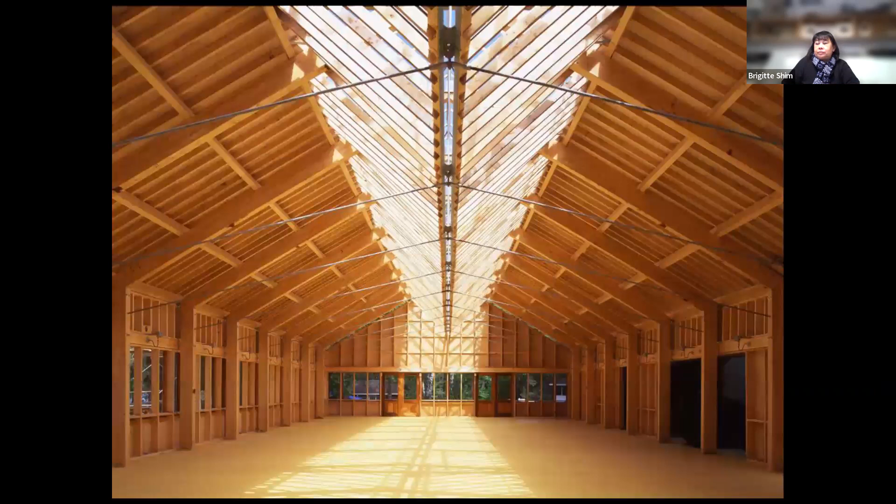This is a dining hall about 3 hours outside of Toronto, called the Moorelands Camp Dining Hall. It's a camp that's been around since 1907, set up by the Anglican Church to get youth out of the city during the summer to experience nature. We were asked to design a dining hall, and we really wanted to celebrate light.

It's a seasonal building, so it's only open from maybe May till October. What you're seeing in the main space is a series of glulam frames and metal tie rods that work in conjunction with the wood, and then down the center is a whole series of 2x4s—very simple wood elements.

Above it is motorized greenhouse glazing, really off the shelf, very much industrial greenhouse, but it provides both light and ventilation. It's motorized, so it can go up one side, the other side, or both sides, bringing light and fresh air into the space at the same time.

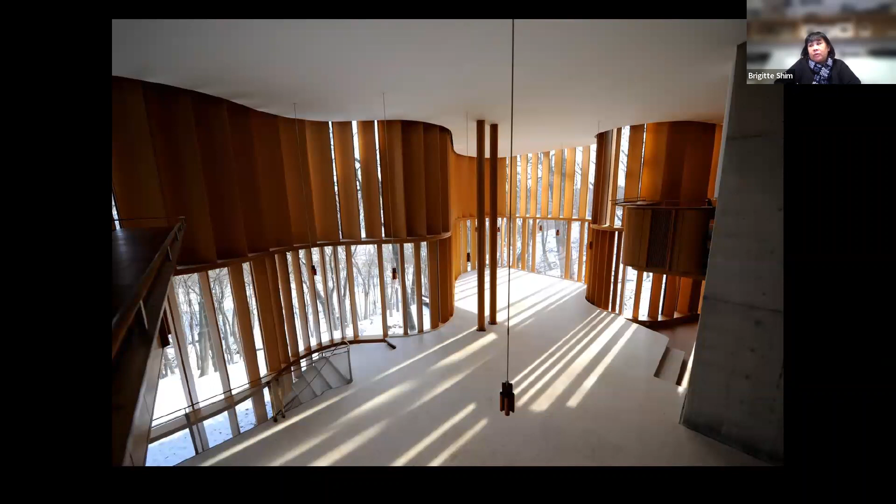This is a project I'll actually be sharing with you called the Integral House, which sits on the edge of a Toronto ravine, but what you're seeing here is winter light. We live at 43 degrees latitude, and the role of winter light for us is really important because it's a very low raking light and it changes so much. You can see the ravine beyond is actually denuded—it's winter season—and it's only during this time of year that you get these amazing kinds of light qualities that differ fundamentally from spring, fall, and summer.

So we think of ourselves as architects who paint with light.

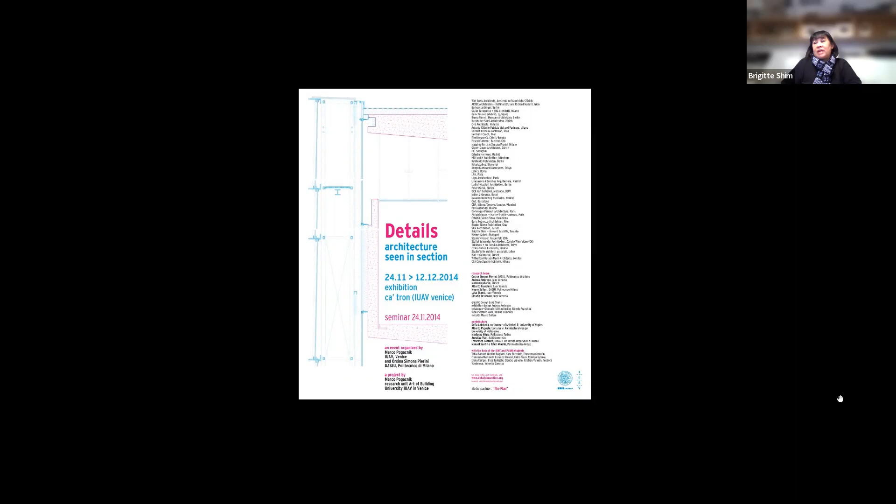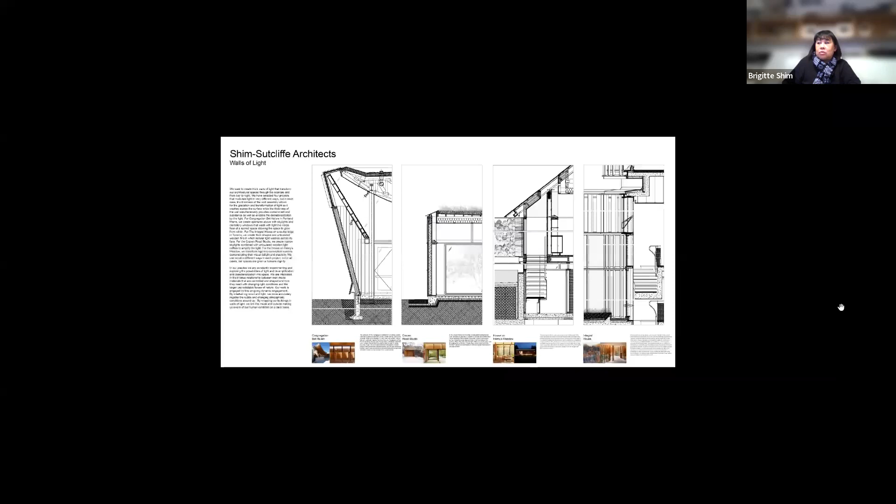This is our panel where we selected several projects and blew up the actual sections really large. We called it 'Walls of Light,' so that within the thickness of the wall itself, there were different ways that light informed and embedded itself into the wall. We then used it to study a lot of our projects with the role of light.

The image on the left is a diagram of a very small building we designed, a studio, with a very small skylight that becomes the aperture, and the wall changes thickness on every surface. The image on the right is a section through a synagogue we designed in Portland, Maine, showing the asymmetrical section, the curving underside of the roof, and the way light enters the space itself.

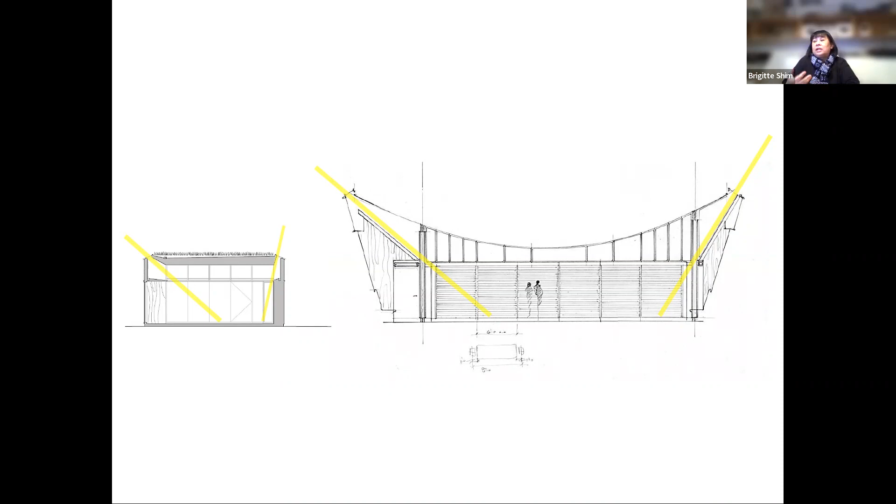So it's just something that we think about a lot. We love the way light can be manipulated and shaped to really give a certain specificity to places. This is a view of that small studio and a detail where you can see this small skylight, and then the thickness of the wall.

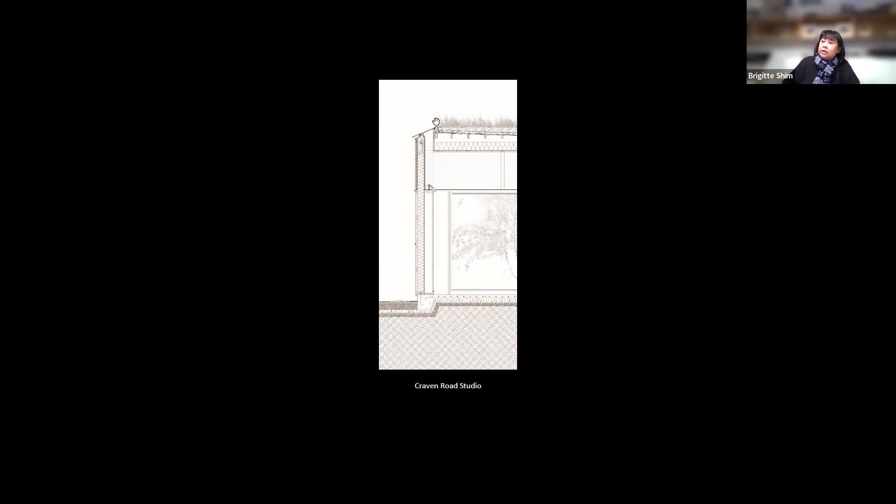In the image of this one-room studio, you can see that each wall is a different thickness. One wall is for display, another wall is for storage. The skylight stays the same, but the thickness is related to the program. The light enters these wooden coffers and illuminates the room itself.

And here's the display wall. So for us, these small projects that we do in our studio are really important because they become laboratories for experimentation.

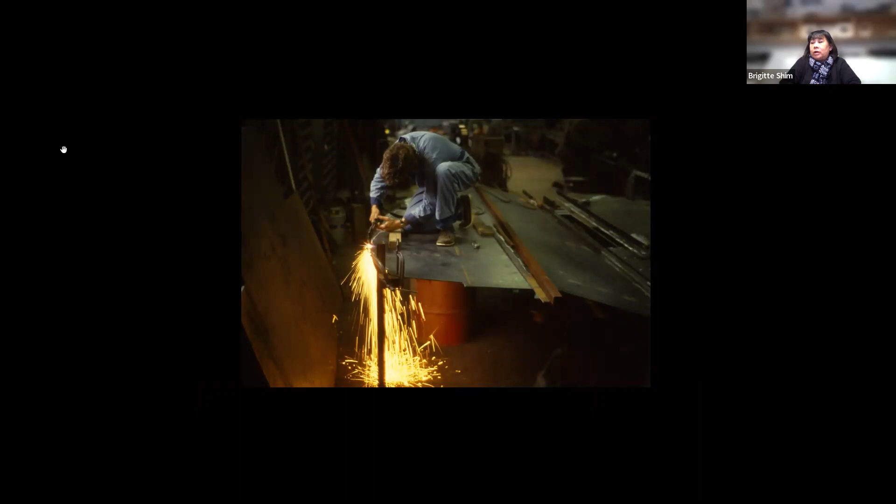This is Howard, my partner, flame cutting the edge of a roof that's about 1.5 tons of rusting steel. In a way, it indicates our long-term interest in materiality. We actually work with real materials, and we love working with fabricators. For us, it's a critical part of really shaping buildings as opposed to specifying buildings.

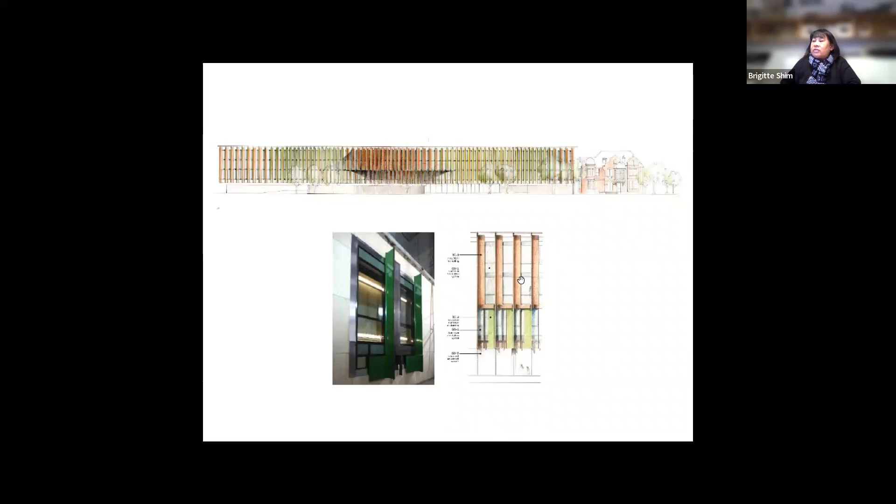This is a facade of a project I'll show you later for a group of Catholic nuns, but we're always also trying to do full-scale mock-ups. This is a view of the elevation of the building, a detail of one portion, and then a photo of a full-scale mock-up that goes about 1.5 floors.

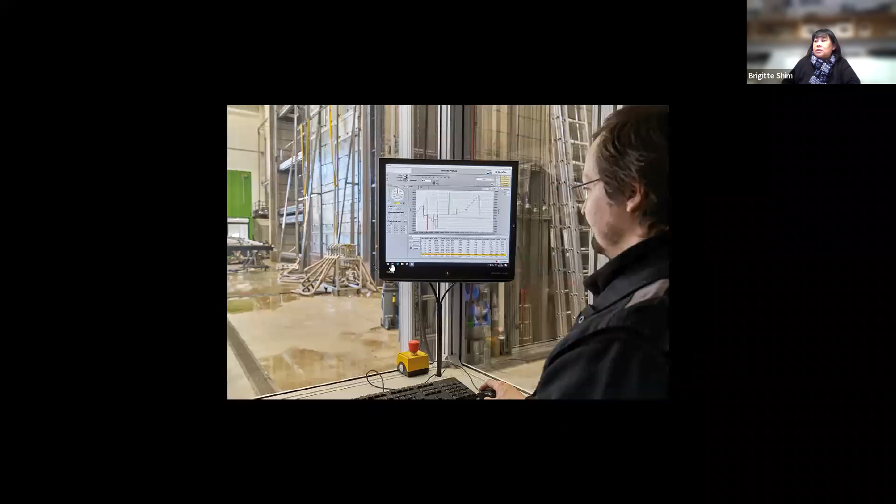The project envelope and the vertical sunshades were actually built in Germany. This is the mock-up in a testing facility, where we were able to test it—they hurl water and push it by wind. They monitor it and do a whole analysis, finding ways to improve the performance of the actual system with minute adjustments before the window goes into fabrication.

The Taoists actually do Tai Chi, which is a form of exercise. You've probably seen people doing Tai Chi in a park somewhere. But for the Taoists, it's actually a key aspect of their spirituality. It's not just an exercise, but part of their sacred practice as a religion.

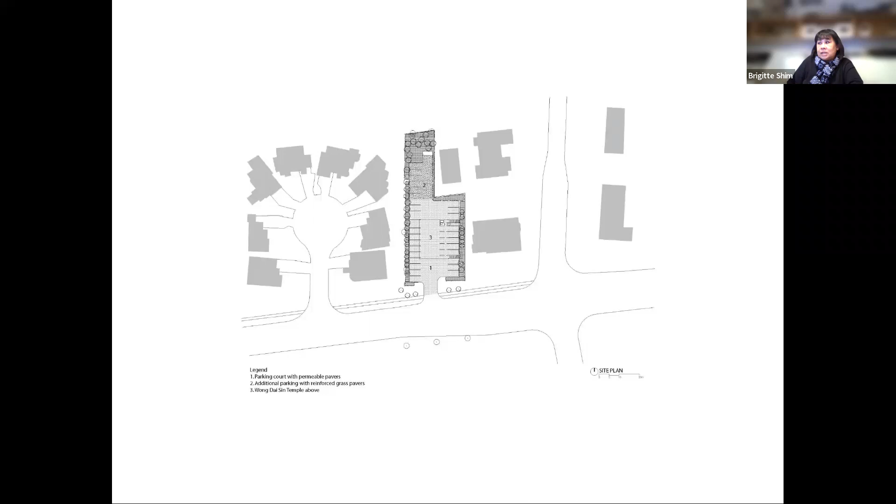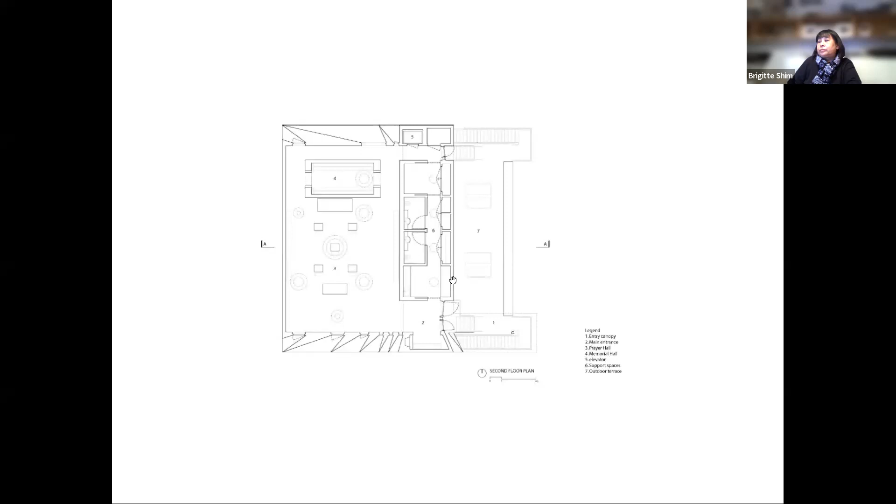The plan is very simple. At the back, there's a memorial hall for honoring your ancestors and burning incense. The room itself is for chanting and praying to Wong Dai Sin, which is the deity the temple is named after. You can see these deep fins that provide both privacy and cross ventilation, then washrooms, back of house, and a small kitchen. A pretty simple plan with an outdoor terrace on the other side.

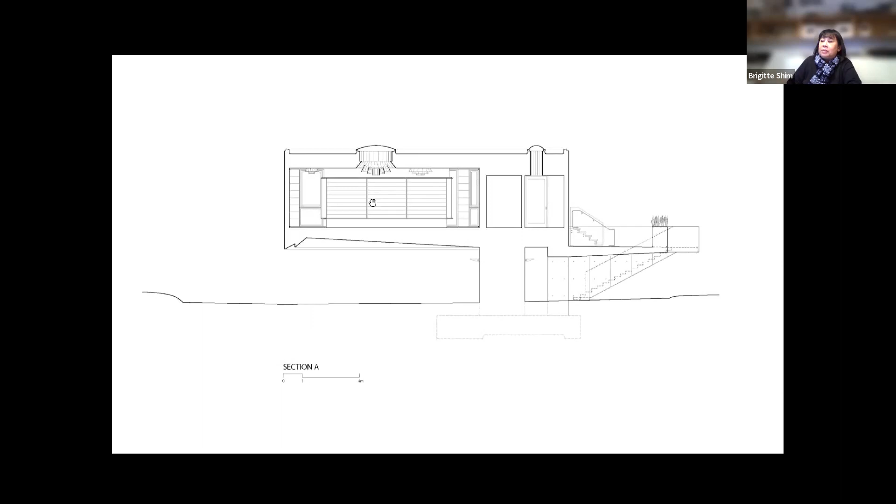And then in section, it's actually very telling. You can see the 10-meter cantilever, the structural concrete, poured in place concrete piers, and the 5.2 meter cantilever. You can also see these circular light monitors that are key to the most sacred part of the place of worship, and the way the structure is cantilevered in both directions, which is a really key part of the project.

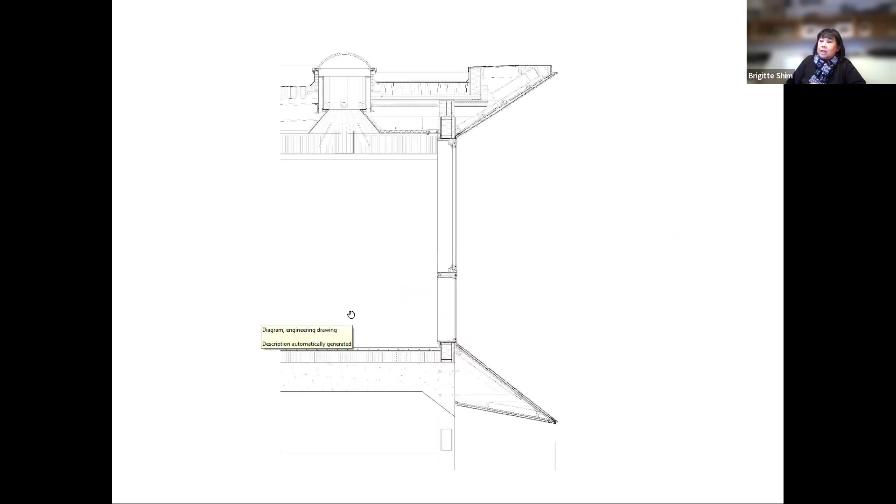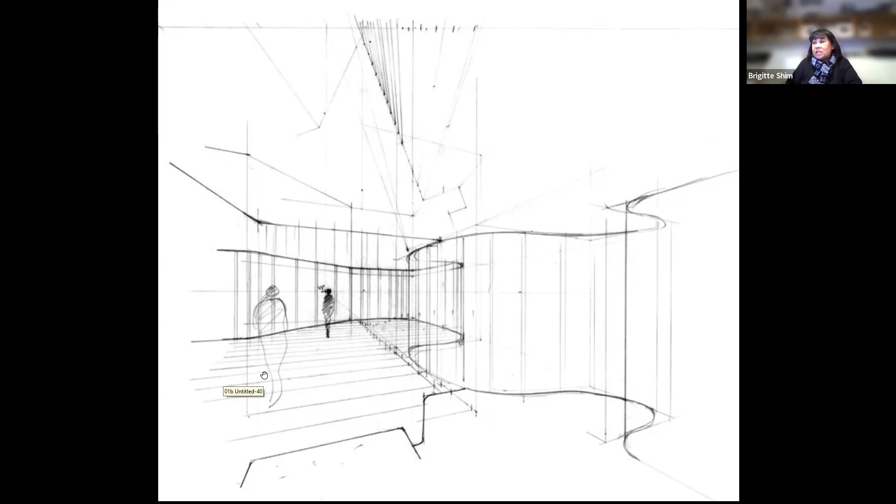This was a very early sketch, and this was a study model looking at the main space. In addition to curves, he wanted a performance space. He was a concert violinist and wanted a performance space for about 150 people in his living room. So in a way, it's a private project that straddles a public program.

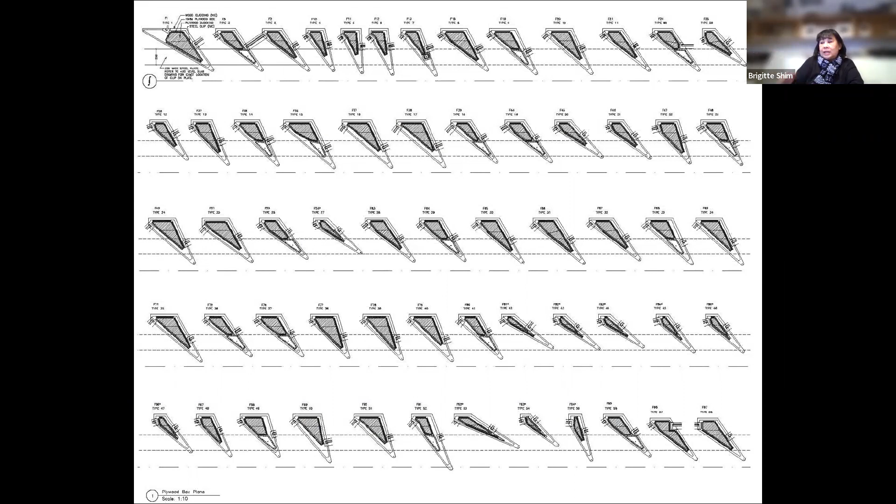Here's an aerial view looking down at the main living space. As part of that living space, we designed 97 different fins that help to shape the light. You saw in the image we showed in winter, this long winter light - part of how we achieve that is through these shaped fins that bring the light in, but also adjust and alter the kind of light before it enters the space.

In these deep fins, we embed a double glazed sealed unit between the shaped fins, and every third one of these fins is actually structural, so it becomes a huge structural cage. But really what happens is that you're looking at light and wood - the light passes through and develops a warm glow because of the way it passes through the wooden fins.

This portion is exterior and made out of a tougher, long-lasting wood, and this portion is interior, part of shaping the interior space. The glazing is a double glazed sealed unit, but it's actually embedded in the wood, so you don't really see a window frame. All you see is light and wood.

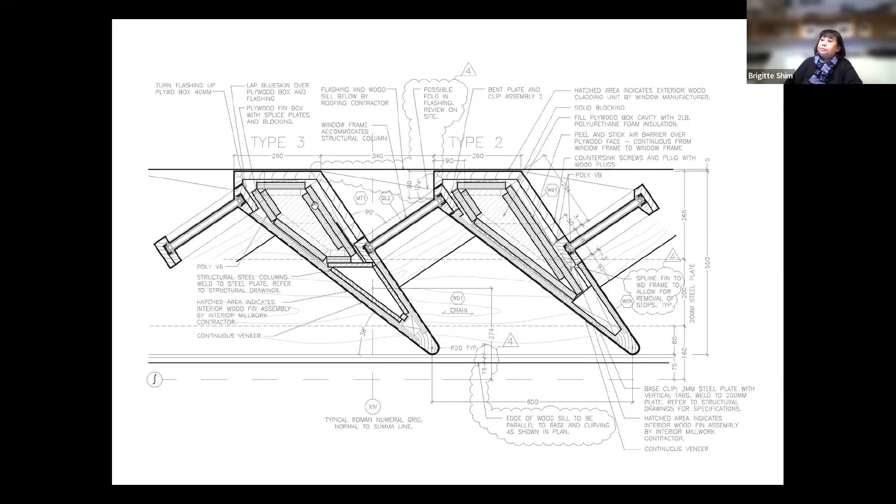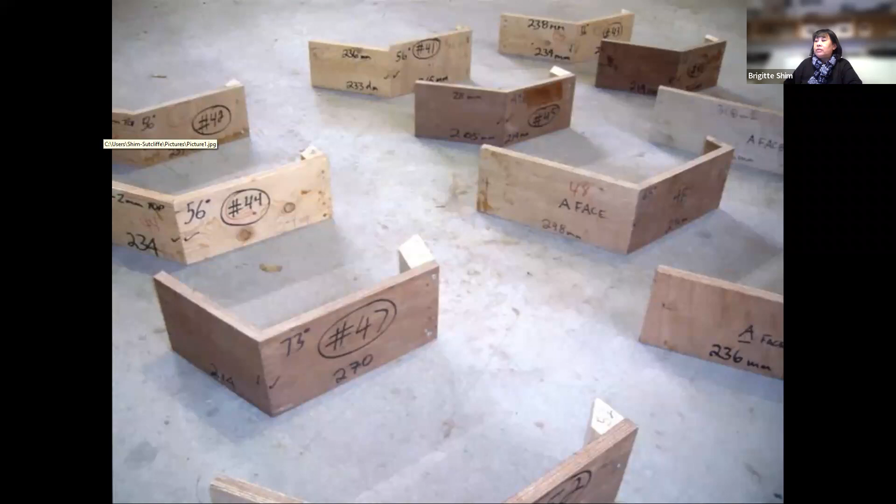Here's a view of a series of these outdoor covers - you can see they're all numbered, and they're fitted to go on the exterior of the building. And here you're seeing some of the interior fins that were part of the construction process.

We also have what we call a more standard fin, with a kind of snap cap, a double glazed unit, and then a more standardized fin. Again, you never read the window frame - the actual double glazed unit just slips in behind the wooden fin. So again, all you're reading is wood and light.

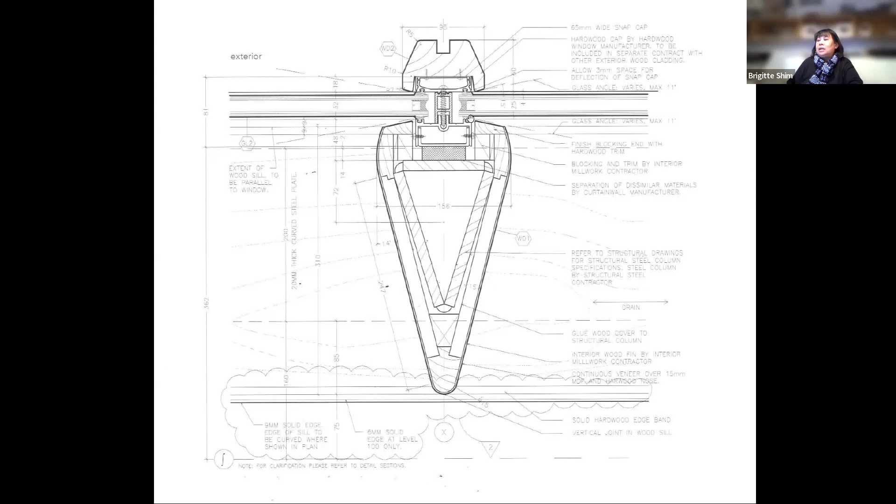Here's a full-size version of that same detail, and here you're seeing the standard fin. In a way, both become really key in building this kind of elevation in the middle of a ravine forested landscape. Here's a whole series of studies, just a selection of many.

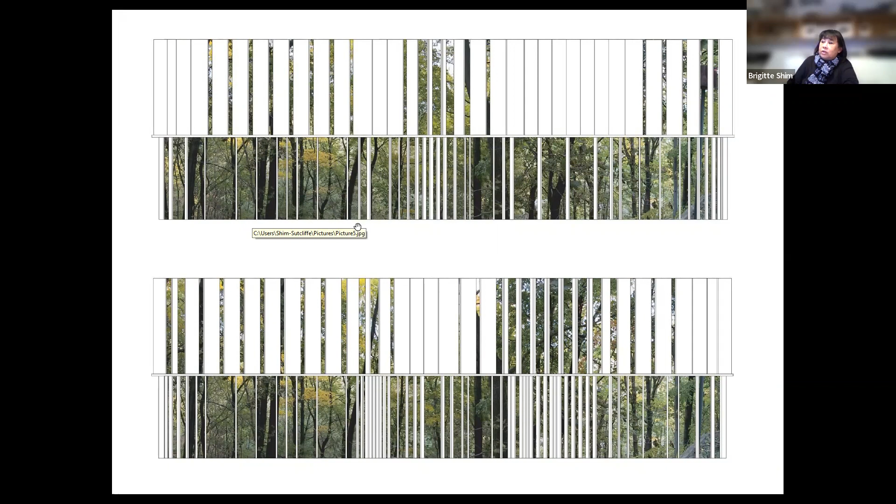The upper portion are the deeper fins, those 97 different ones I showed you, and the lower ones are the standardized fins. Every third or fourth one is structurally loaded through to the foundation of the building. We're using these collages to test the way it creates different views and shapes your reading of the landscape.

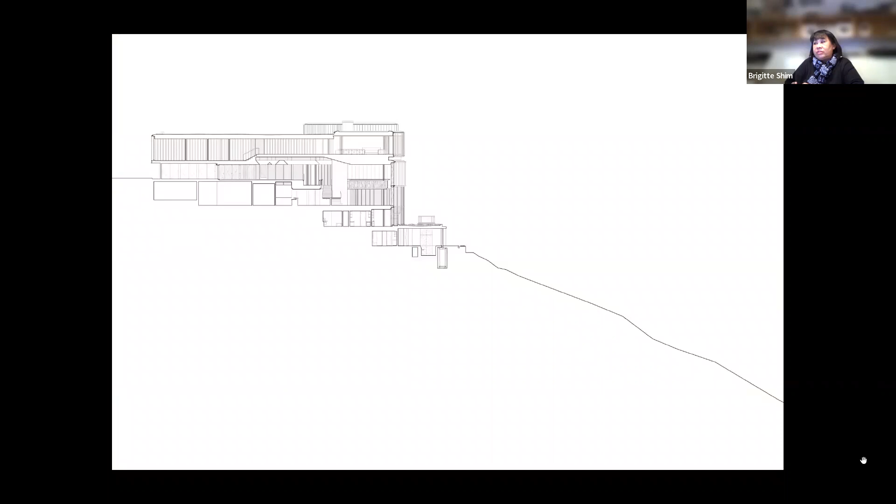Here's a section - the street and the city are up here, and the ravine itself ends up somewhere way down here, so you're really at the edge of this important natural feature that helps define the city of Toronto. This is a cross section where you enter at this level.

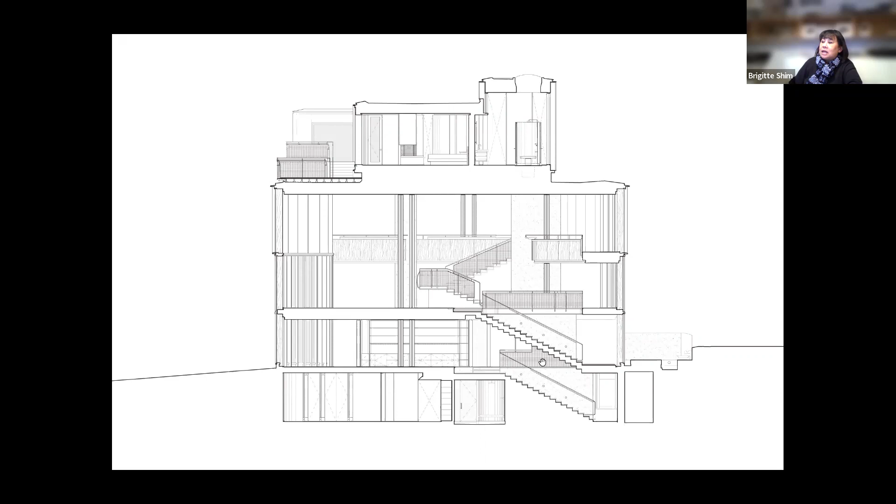You come down a full floor to the performance space where 150 of your closest friends can hang out with you. Above are some residential bedroom spaces, study spaces below, and then pools at the lowest level.

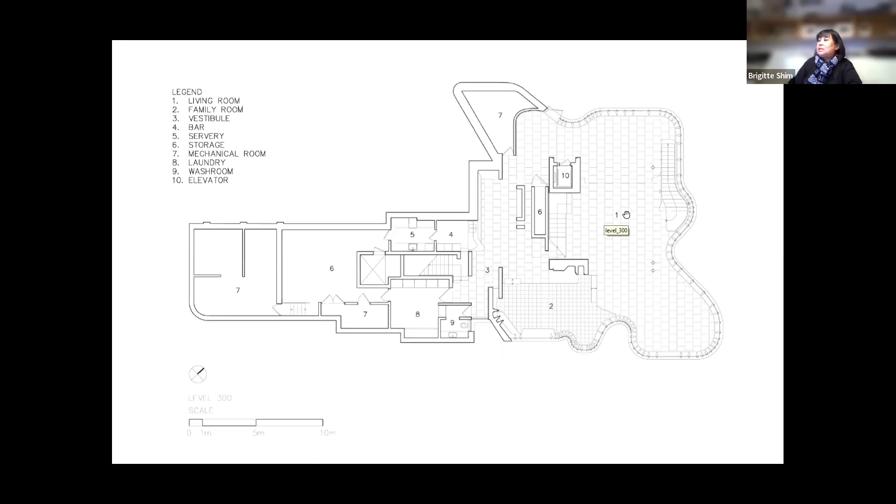The material palette, we actually use concrete, kind of limestone, bronze, and leather, and then a stainless steel mesh, to be part of the kind of vocabulary on the inside.

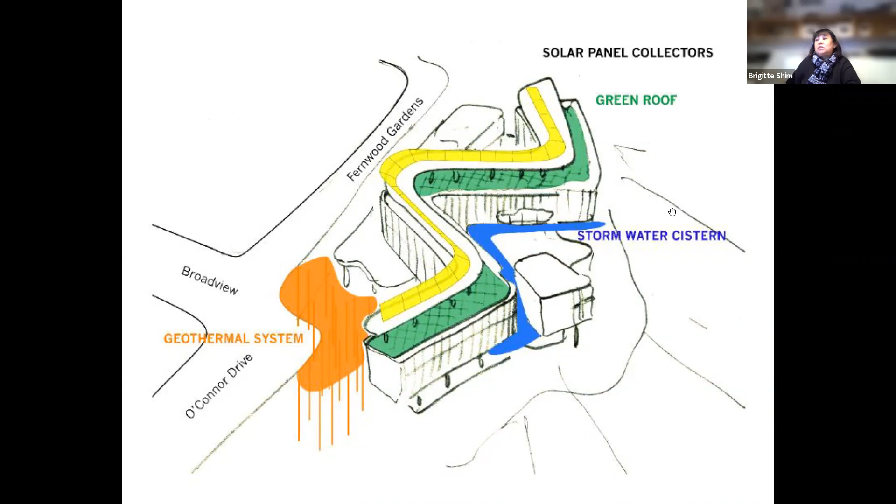One of the important things is that the sisters wanted the greenest building they could afford. So we looked at a whole system of geothermal, PV panels, green roofs, and rainwater collection, and priced everything umpteen times until everyone agreed we could afford it. It was about getting the best value possible for each of these elements and seeing it as a system that worked together.

The project is a residence for 54 Catholic nuns, with a chapel, dining rooms, and the restoration of an 1850s house. This is an axonometric view, and what's important is that in the middle is a double loaded corridor with rehab and nursing stations and support facilities for the sisters. Each of the wings are single loaded corridors where many of the sisters' rooms are located, so you can go from the single loaded to the double loaded back to the single loaded.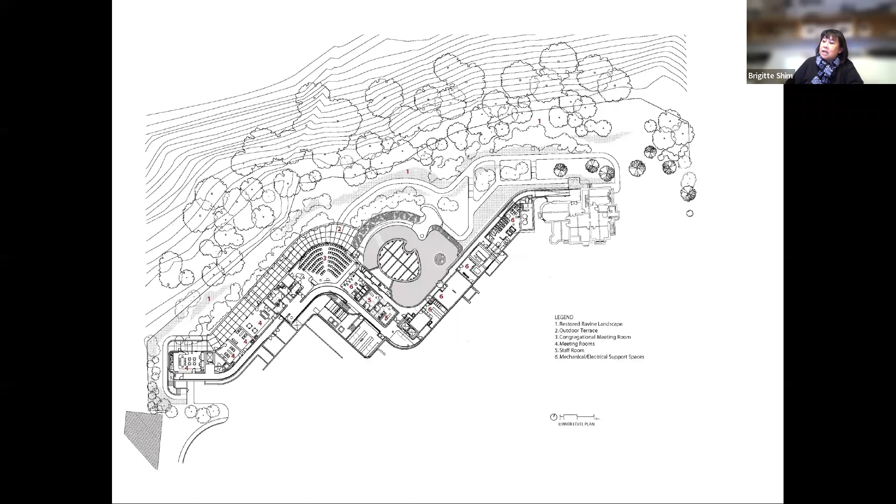This is the lower level of the Taylor House that connects underground to all of the back of house spaces for the sisters. As we go up, you can see the double loaded corridor and then the two single loaded corridors.

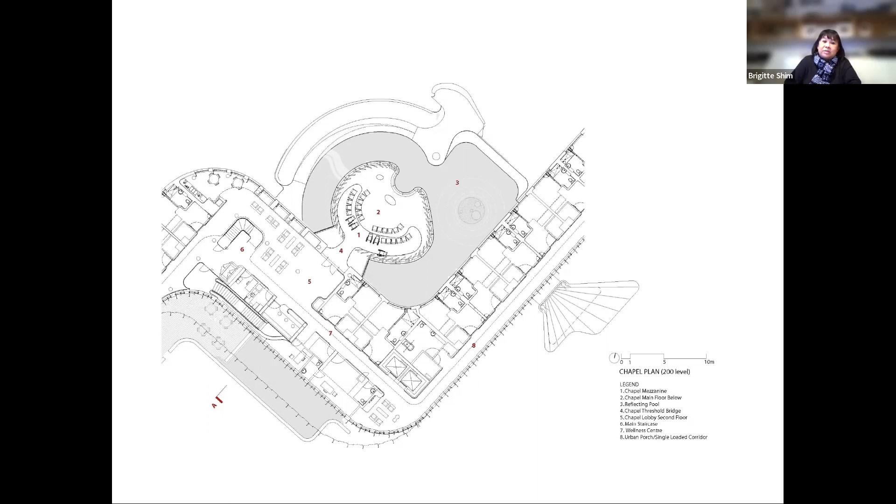And then we actually have the chapel, which for the sisters was actually one of the key spaces, given that they are women, religious women of faith. And they really wanted a chapel where they could see nature. They had a very large chapel in their previous monastery, and you couldn't tell if it was snowing or raining because it was so internalized. In this new chapel, they really wanted to be connected to the seasons, and that was very much part of the program that they asked for.

And so here you can see the sisters' floors where the residential rooms are. And from the second floor, the most infirm sisters can actually enter the chapel from the second floor and partake in all of the religious services from there.

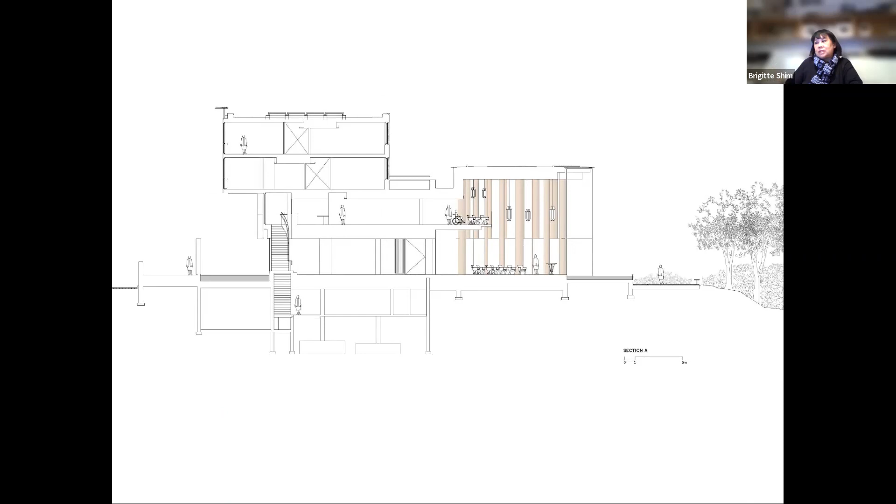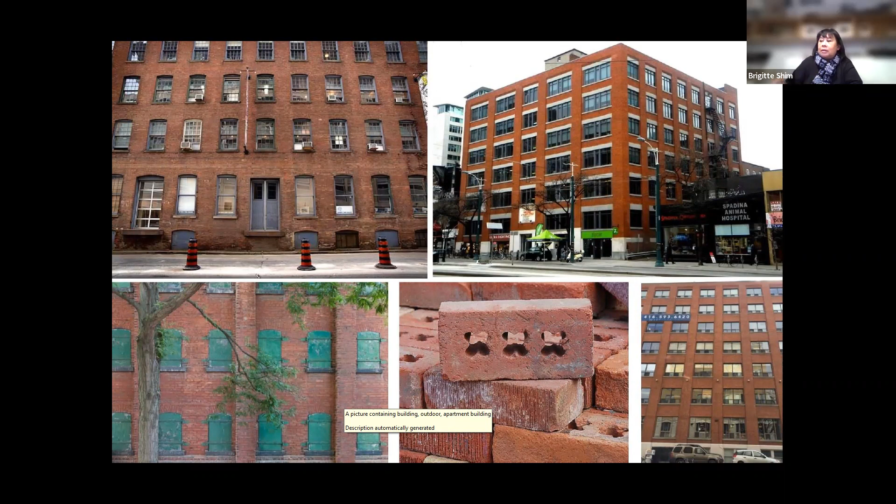And so we started off in a neighborhood that is full of these existing red brick warehouses. Toronto is a red brick city. The clay came from the Don Valley. The bricks were fired in the valley, and it's really the fabric of much of our city. And many of these warehouses that are such amazing buildings are being demolished or renovated. So there are very few warehouses left in this area where the hotel is, when before it was populated by hundreds of them. So we're designing a new building, but we actually wanted to recall these amazing existing buildings that are dwindling.

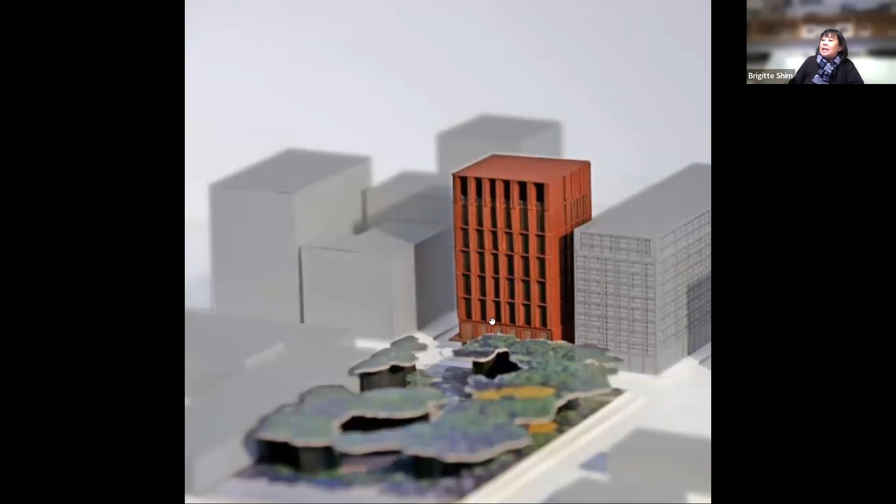Here's a study model showing it. This is a small playground called St. Andrew's Playground, and these are new buildings. And here's our 14-story hotel sitting within the city itself.

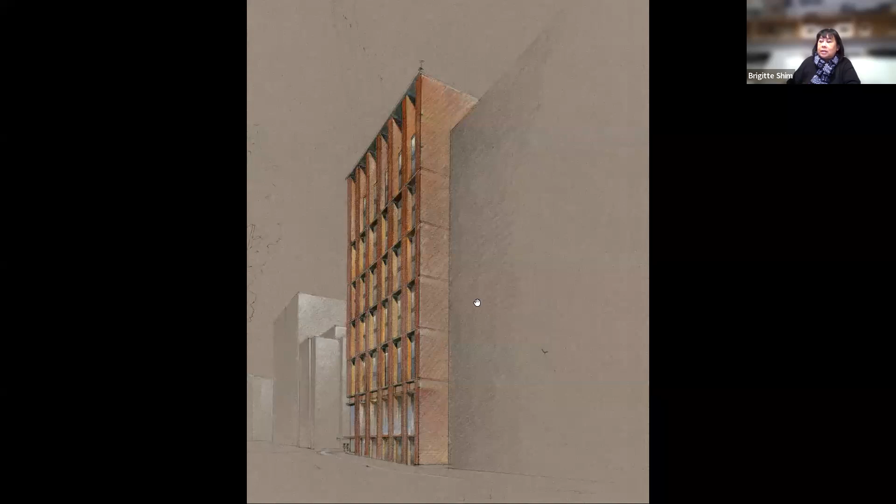Here's a view of it from walking up the street, where it sort of has depth and plasticity, and is really recalling these kind of red brick turn-of-the-century industrial warehouses.

This is a view of the front facade that you see from across the park, and where each of these bays is actually 2 floors. We wanted, again, to have a certain ambiguity as to what the scale of the building really is.

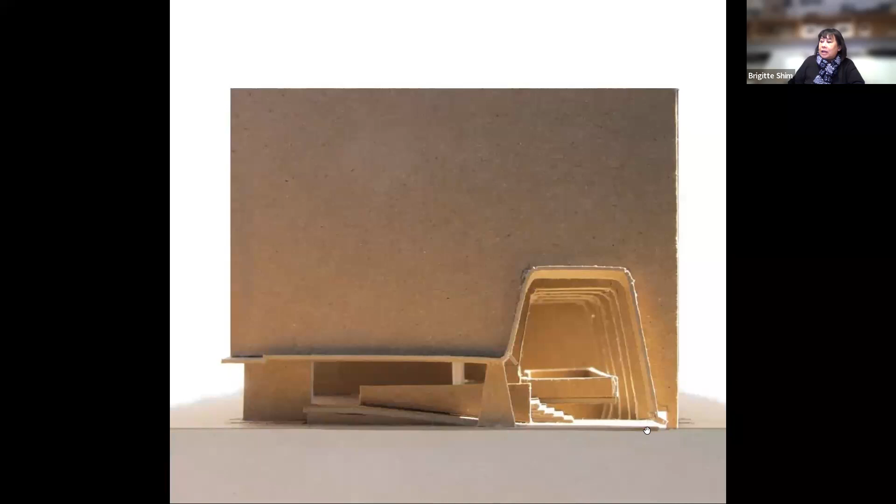Here's an early study model where we're looking at a series of poured in place concrete frames that transfer the load from the hotel rooms, and use these robust poured in place concrete frames to shape the lobby.

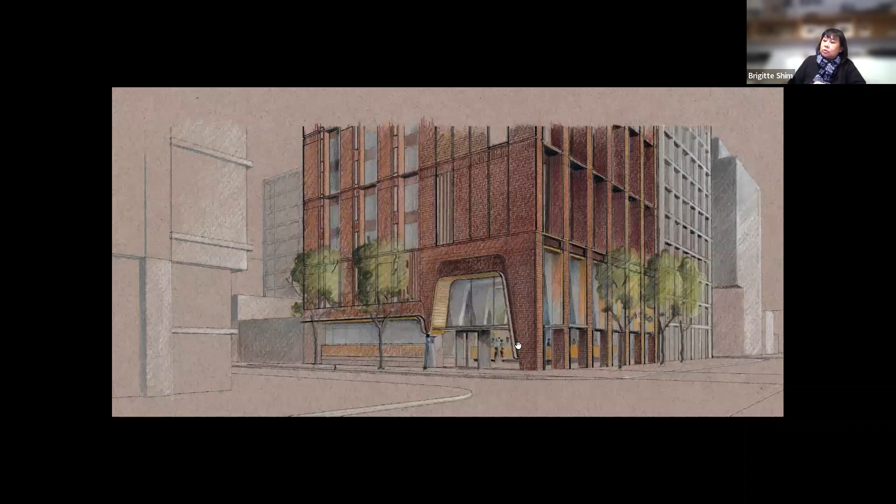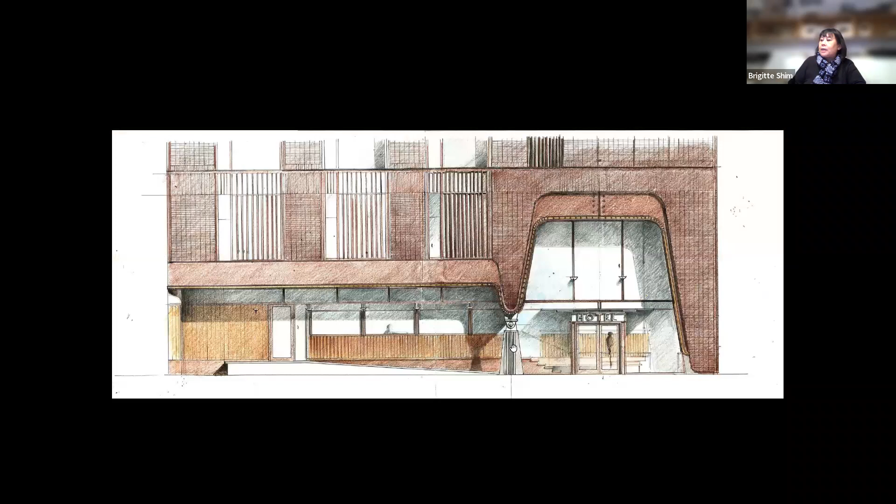Here's a drawing of the corner condition, so again the kind of one side looking onto the park and the other side, which is a smaller side street. And the main public entry, and then ramps for luggage and for accessibility to bring you to the same location at the entrance.

Working with brick and shaping the brick, steel, a whole series of metal screens that work in conjunction with this red brick iron spot that we've chosen.

Drawings that show this kind of big structural poured in place concrete frames, and then the lobby is actually slid inside and supported from these frames itself.

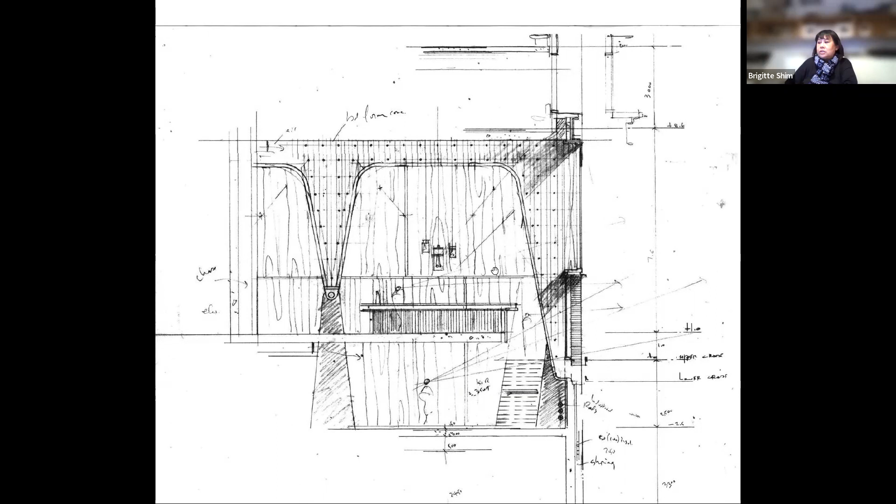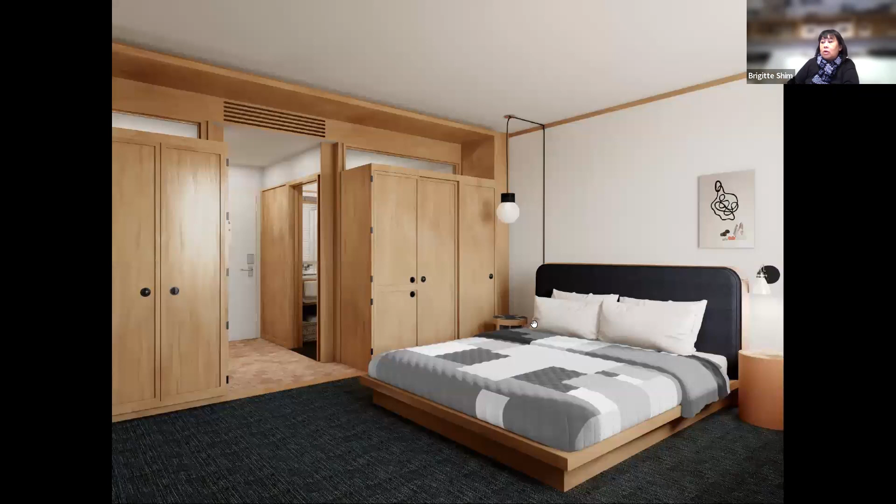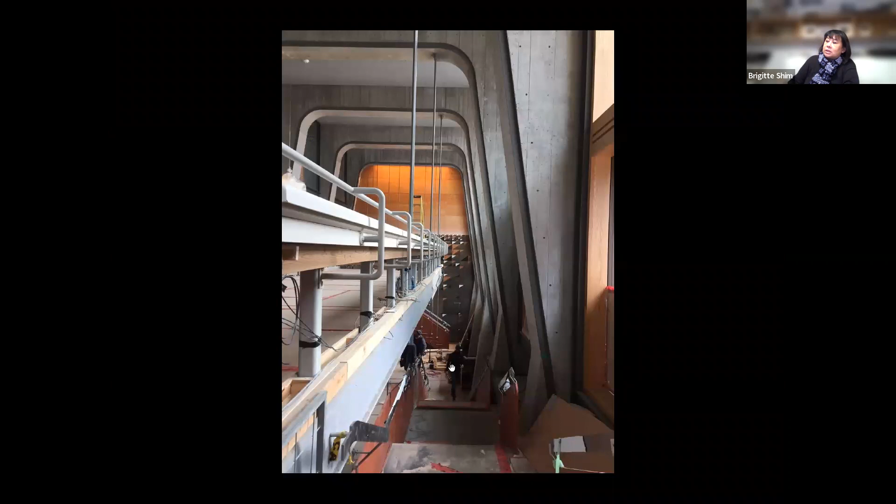This is a view of one of the hotel rooms, so that it almost feels like a cabin in the middle of the city. And then a view here where you're at the entrance looking down into the lobby. The hanging portion of the lobby is on the left, with these rods that support the lobby from these large poured in place structural frames.

And to enter the restaurant, you actually slide down between the outer wall and this hanging lobby to end up in this triple height space.

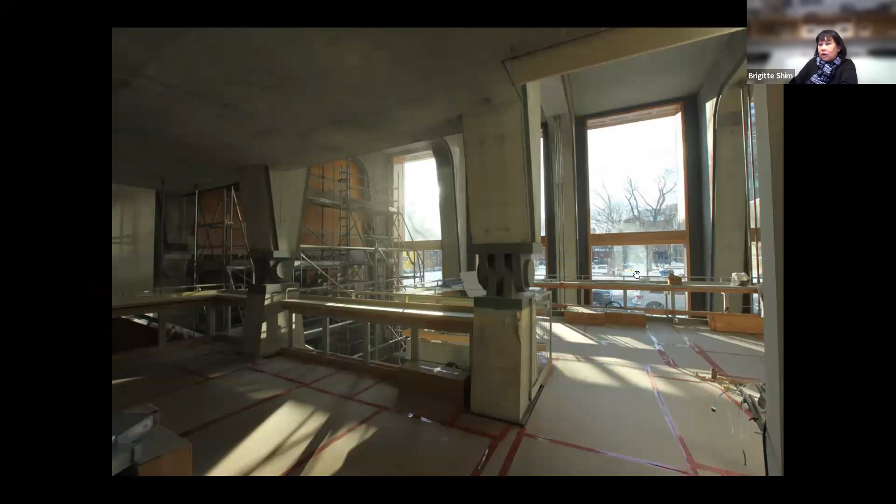So again, these are all construction photographs, but you can see we're standing in the lobby itself, looking south, and you can see those big concrete frames, the big knuckles. Then you're here looking out over the park, St. Andrew's Playground, and again, the scale of the knuckles in relation to this urban lobby space.

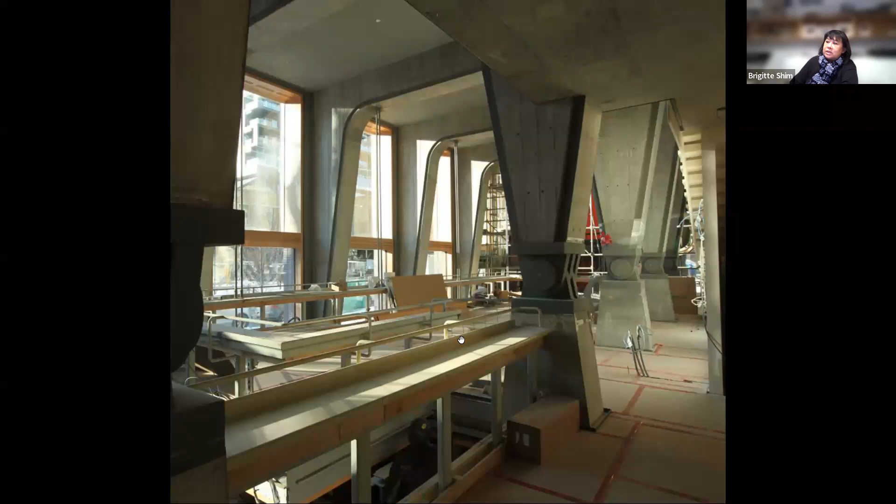Again, a view of a three-story art installation and the kind of afternoon light entering the space. And views along the space where you're seeing, in effect, the long view down.

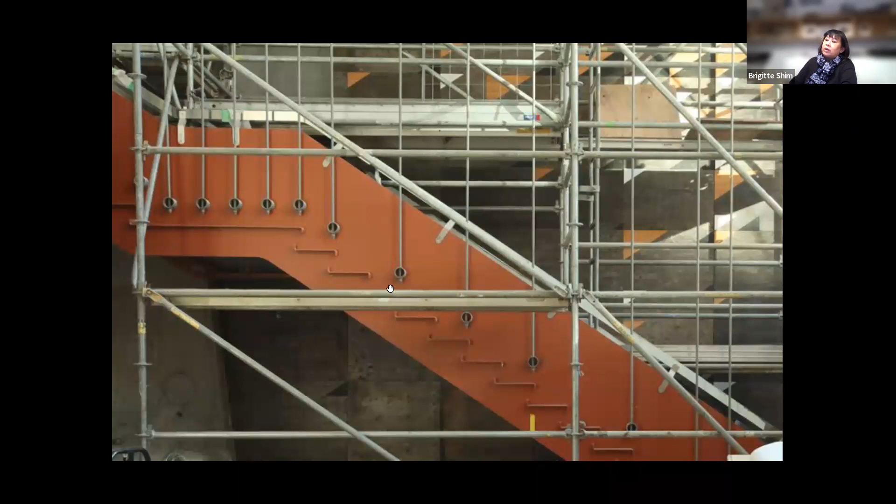And then details of the stair itself, where we're also using rods to hold up the space. And again, a view of this art piece called Horizon Line and its role within the overall project.

So that's my last image, and it's really a kind of work under construction, but it gives you a sense of what's to come, and we're really excited to see it happen because we really wanted to create a dynamic civic room in the middle of the city where people could really be in the city, but also enjoy this kind of dynamism of this multi-leveled space.

So thank you so much. I hope you have a better sense as to how we work and some of the things we think about, and the way that we actually approach architecture, both through process and through the final results.

Thanks, Brigitte. That was outstanding. I've got a couple questions I want to ask you.

Mm-hmm. You have any water there? You want to take a break? That was—I know it's okay, an hour of talking. It's okay. I've got a cup of tea, so.

Part of what I love about this is your environment is so fundamentally different from where I'm working in Stanford, and where a lot of people watching are working in the Bay Area. The climate is so extremely different, and you talked about how light influences your work a lot—you paint with light, particularly at that latitude. What other things does it influence in the design process? The extreme climate, but also the impacts of that extreme climate on mental health.